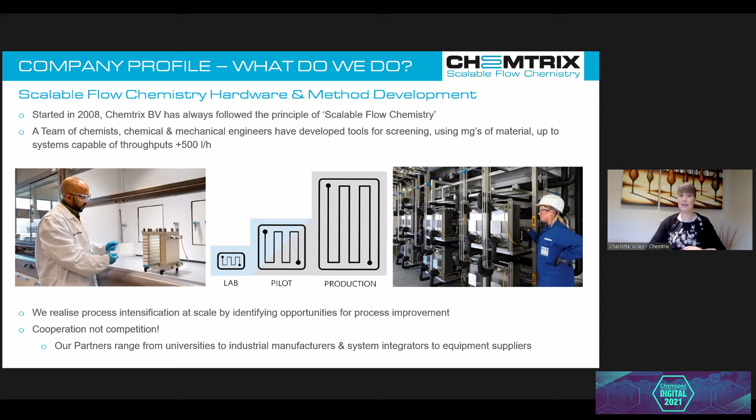We work with universities through to industrial manufacturers, system integrators, suppliers, in order to deliver end-to-end solutions for whatever the problem statement is.

In the last 18 months, we've obviously all seen the impact of COVID, hence why we're at Chemspec Digital and not the live event this year yet. This has highlighted to us how much each country relies on outsourcing in order to obtain critical raw materials, APIs, and even electronic goods.

So we've seen in the past 15 years, people have wanted to reshore manufacturing, but it hasn't really happened.

And this period has really highlighted local supply chains are needed in order to overcome the challenges that have been seen. So APIs especially, raw materials and intermediates, is a very global business with molecules moving from country to country as the value addition increases.

But the border closures, travel bans, and industry shutdowns that we've seen during the COVID period, and even continuing post with difficulties with shipping, have really showed up the resilience that we need within our supply chains, the critical raw materials.

So we're now seeing widespread through US, India, China, Europe, countries assessing alternative value chains.

Can they manufacture locally? Can they finish goods locally? And can they do this on time with surge protection, as opposed to shipping in and stockpiling material from a single country?

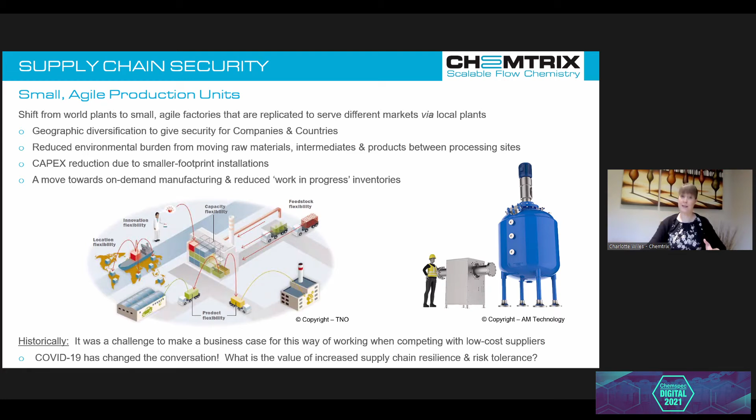So one aspect of this, and not the only solution, but one aspect is continuous manufacturing. We see from the small footprint of the equipment, the process intensification associated with it, that people can now harness improved process control and shorter development times as a means of performing particularly hazardous chemistries. As a result of this, you end up with a small production unit that's typically in a pilot plant environment compared to a world plant environment.

As a result of this small footprint, you obviously have many benefits towards energy consumption and material production per unit area. So the technology is something that we're seeing being more heavily adopted in the pilot to production area than we've previously seen in the past.

And we see many more companies starting researching, trying to get to grips with what advantages can this technology bring and where should they deploy it to alleviate problems that they've observed over the last 2 years.

We also see for the companies that had already pre-invested in this area, companies are directly developing in flow now. They're not first developing a batch route and then putting it into a flow reactor and possibly needing to modify the process, but we are seeing people developing directly, and this is increasing again the speed to market and reducing investment costs and giving the flexibility that people are targeting.

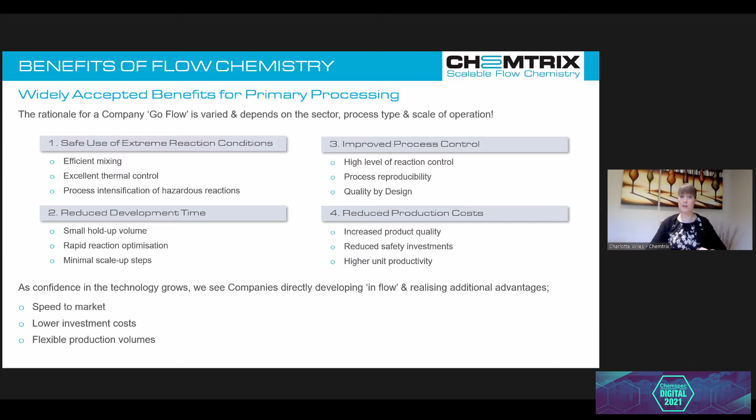So it's really important before you start that you identify what you need from a continuous plant, and this will help you design and engineer in the most forward-thinking approach, but actually the most suitable for the particular molecule that you're wanting to implement initially.

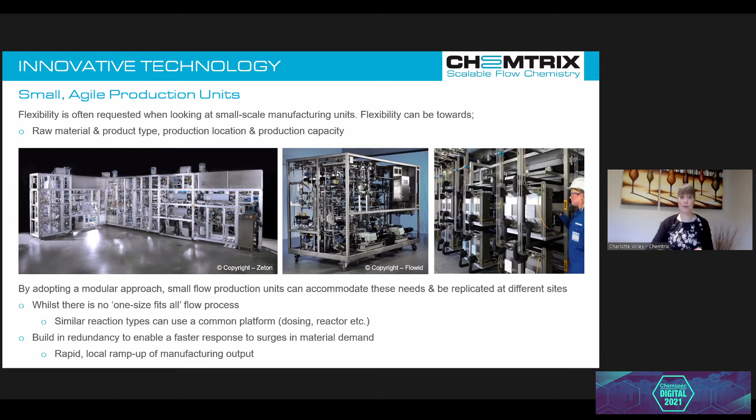And I think it's this flexibility that brings a lot of attraction to contract manufacturers, as they're able to reconfigure the hardware to deliver different molecules and different campaign lengths for different customers.

So in the images, what you can see here on the left-hand side is a plant developed by Zeton and built for GSK. And you can see from the grid-like structure, modules are built together in order to deliver the final configuration. This allows you to have freedom over repurposing pumps, residence time units, chillers, etc. So you could redeploy these parts smartly to develop different processes and manufacture different materials.

In the center here, you've got a system that I'll show you a little bit more detail later from Flowid, working together with a pharmaceutical company. And you can see this is it. It's got wheels. It's a small modular footprint flow reactor. And the idea here is that it can be wheeled into a factory, and it actually sits between existing batch assets that form the upstream and downstream reaction steps.

So here you've got something small, modular, but more dedicated to a single piece of chemistry or a class of chemistries. And on the right, you can see an installation that we've got together with Patheon, Thermo Fisher in Austria. And you can see modularity here is addressed with multiple reactors in parallel, allowing you to turn up or down productivity as market demand changes.

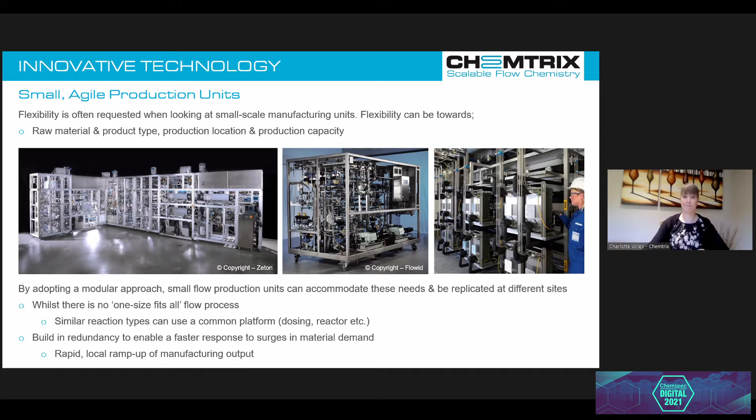So for those of you that are new to continuous, I'll just give you a little brief as to the main features of flow reactions and how they're performed. You are typically working with reagent streams that need to be separated before they are mixed, and that's when the transformation takes place. So typically we're working with a pair of pumps, some form of mixing element, a thermal control section, and a collection strategy.

So the key to understanding how you work with flow is that you're adapting your equipment to suit your chemistry, and you're not adapting your chemistry to suit your batch vessel. So if you have a highly energetic chemistry, for example, you're going to be looking at a small channel with a high surface to volume ratio that can relatively easily cope with the heat release.

If you've got a suspension-based chemistry, you would be looking at a reactor with a larger volume and maybe active mixing within it so that you can handle that slurry. So we're not trying to squeeze all chemistries into flow, but we're looking for those ones that have a technical benefit for transforming into a continuous process.

So the heart of a system you would think would be the reactor, but honestly, you need a good dosing system. If you're not delivering well to your reactor a good stable flow of reagent, you will get deviations in your product, and this will affect the quality of what you're generating. So really key is to choose your dosing system well and ensure that it's appropriate for the reaction conditions, the temperature, the pressure, and the corrosivity of your chemical.

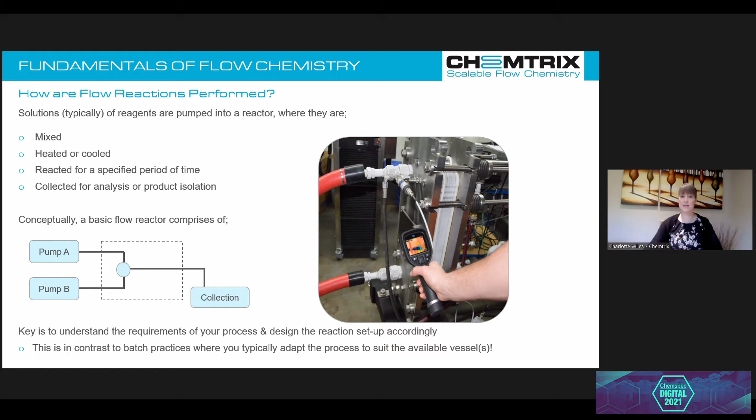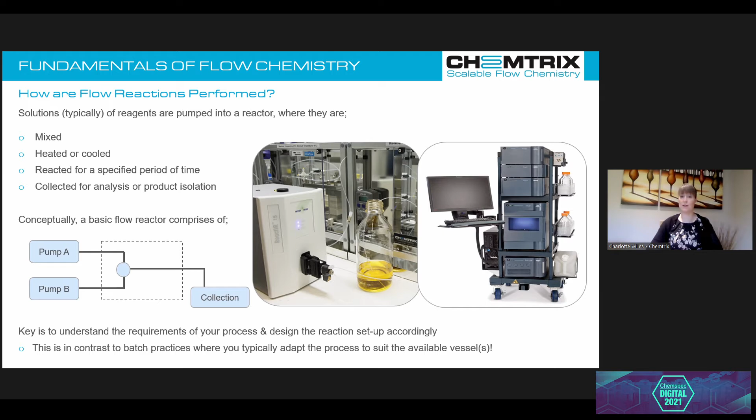You then choose an appropriate reactor with the right thermal control associated with it, depending on the exotherm that's required. You put PAT in place, could be as simple as flow meters, pressure temperature sensors, all the way through to UPLC for online or at-line determination of your critical raw material attributes and product attributes.

And because of the intensification of these processes, you are typically in what would normally be a kind of pilot scale environment, but you're able to manufacture really significant quantities of material, as I'll show you in some of the examples.

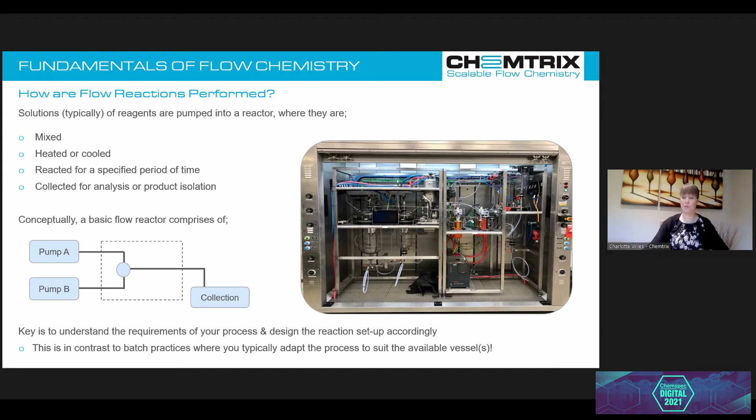So the challenges and the opportunities with flow come from the scale that you're working at. And here we've got an example from Eli Lilly. And this just gives you a broad overview of why people would technically choose to use continuous. You can see you've got your high energy reactions, your fast processes, unstable intermediates, ability to do route redesign and approach either convergently or divergently your molecule, expanding capacity. So many different reasons why you would choose to use the technology.

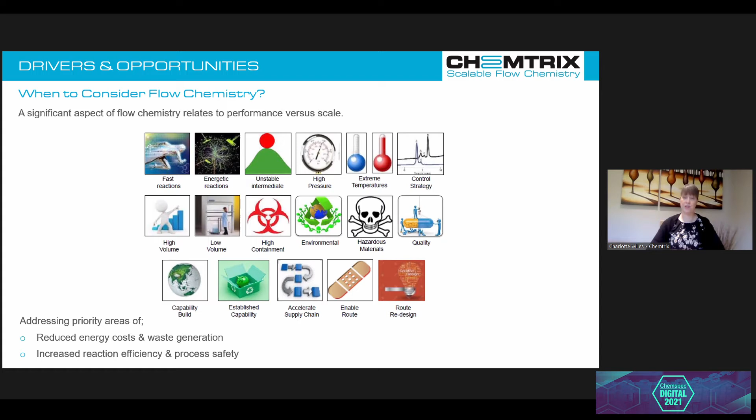And it's really important at the outset of a project that you identify why you're looking to transform your process or conduct it in flow. And this will help you with the implementation really clearly from the outset. So we've been addressing in the last, I would say, 3 to 4 years, priority areas of companies where initially energy cost reduction, waste generation reduction, and an increase in process safety and reaction efficiency. And obviously the last 2 years, that's also shifted to supply chain management and local production control.

So we take projects with partners all the way from theoretical evaluation through to realization. And one of the key parts of continuous manufacturing is defining your process targets. What are you trying to do by going continuous? What's the actual problem that you're trying to fix?

We see a lot of R&D laboratories defining a problem statement without necessarily talking to pilot or production colleagues. And as a result, there can be a solution to a problem that's not really there by the time you get through to manufacturing, and vice versa. The manufacturing colleagues solve on a daily basis a lot of challenges that the R&D team may not be aware of. So we put a lot of energy upfront into this theoretical evaluation. What are the company's opportunities for process improvement, and what is the real problem statement? Once that's in mind, you can go over to feasibility studies.

You can do this in-house, you can do this with a partner or a contract research organization, but you perform the initial lab trials that can deliver proof of concept and outline the milestones that need to be achieved for an optimal process. And if you get a go at that stage, you go into the more detailed parameter optimization, which also, very importantly, defines the process parameters for your engineering design.

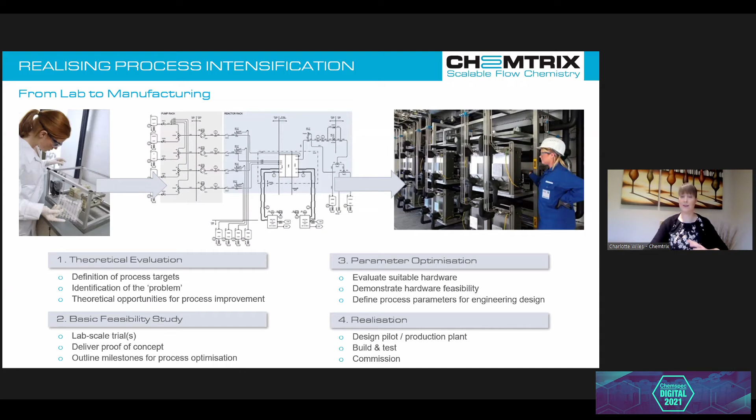So I'm going to give you some examples now of how people have used the technology, typically focusing on energetic chemistries, ones where control was required and local manufacturing and large-scale storage were trying to be avoided. So here you can see a piece of work that we did on a Dakin oxidation using peroxide. We've got here an inline infrared unit, and we're also looking at using a metal-free flow reactor, largely due to the hazards associated with handling peroxide within metal-based systems.

The target of the company was a more direct oxidation route as opposed to multi-stages to get to catechol kind of materials. And they had had an issue with storage of hydrogen peroxide on site many years back. So they were looking at a small scale continuous use of that material rather than large batch tank operation. And what we were able to do was transform the process from 6-hour fed batch into a 30-second flow reactor, obtaining in a typical shift of 8 hours in the lab just under 5 kilos of material. So if this needs to then go into production, depending on the material requirements of the market, you would leave this reactor running for longer, or you would upscale to a larger unit and go into a pilot infrastructure.

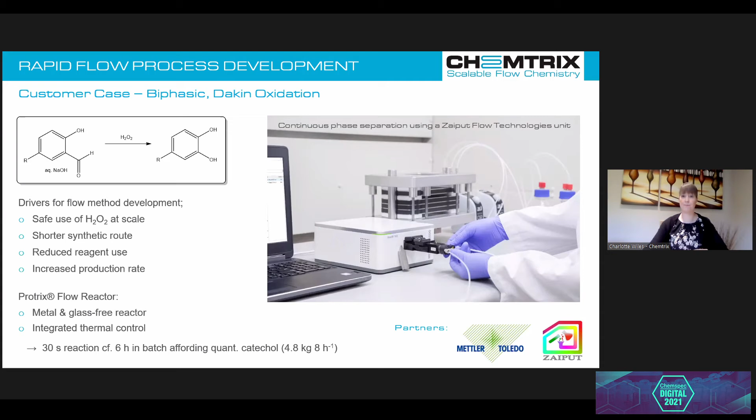If we're looking towards chemistries that are challenging to perform, we did a piece of work with AstraZeneca and Graz University with Oliver Kappe. And here you can see AstraZeneca were targeting a specific reduction to be performed via the Wolff-Kishner reaction. The use of hot hydrazine, highly caustic, high temperature reaction mixtures meant this is a challenge to actually do at scale. So we looked at developing a continuous process, again targeting metal-free because of the degradation of the hydrazine in the presence of a metal and the highly caustic material that was being used.

And for flow, this is not a particularly short reaction time. 20 minutes were needed in order to efficiently reduce the material, but that was enough to increase the yield by 40% and have a high product purity by changing solvent from what would traditionally have been used in the batch environment. So this is something where we're able to increase throughput, decrease reaction time, and obtain active pharmaceutical ingredients using small footprint systems.

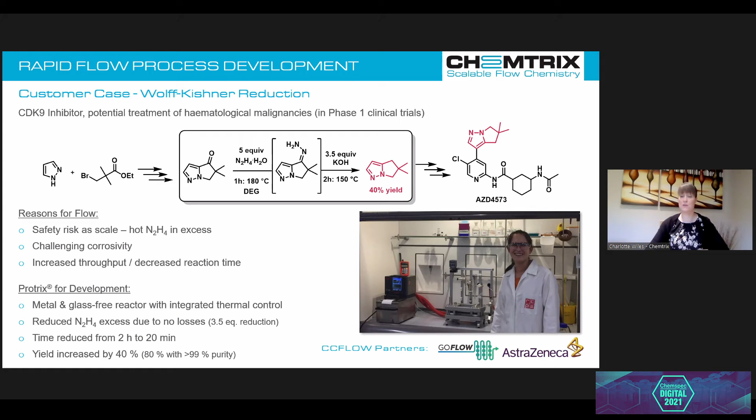It's not just Europe where these activities are taking place. We see partners in China developing new synthetic routes, new cost-effective methods as a mechanism of producing nutraceuticals, for example. Here you can see vitamin B1 or thiamine, which starts from a raw material where we're having to do a very selective, specific monochlorination. Using a flow reactor here, you can see in the schematic, we're able to feed the lactone in directly with chlorine gas with a scrubber after and obtain the chlorinated intermediate.

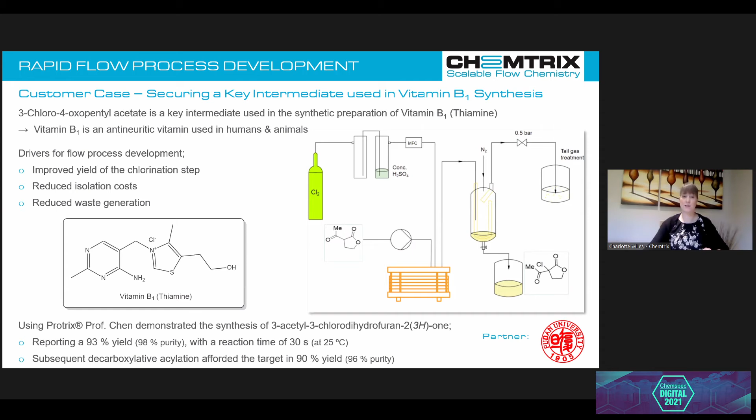This is then treated downstream with a decarboxylative acylation, also continuous, obtaining the product with a 30-second reaction time and a moderate temperature of 25 degrees. So you can perform highly energetic chemistries due to the high surface to volume ratio that these reactors bring you. And this is a process now that's actively being scaled up as a telescoped process to vitamin B1.

So local manufacturing has got the potential to have the most impact in countries that do not have existing infrastructure. So if you consider countries like South Africa and other underdeveloped countries when it comes to chemical manufacture, they're almost paying over the odds for active pharmaceutical ingredients that then need to be formulated locally to be delivered to the local population. And we see a huge potential in countries such as South Africa having their own API manufacturing. And because batch doesn't exist in these territories, it's a good location for people to go directly into the newest technology and start to look to continuous.

So this is a global concern. However, locally in South Africa, as diets are changing, there is an increase in the incidence of type 2 diabetes. So together with partners, Professor Watts is looking into synthetic strategies to locally develop these generic drugs. And this will give control not only on formulation locally, but also the API, and that will give cost reduction and also more availability to the local population.

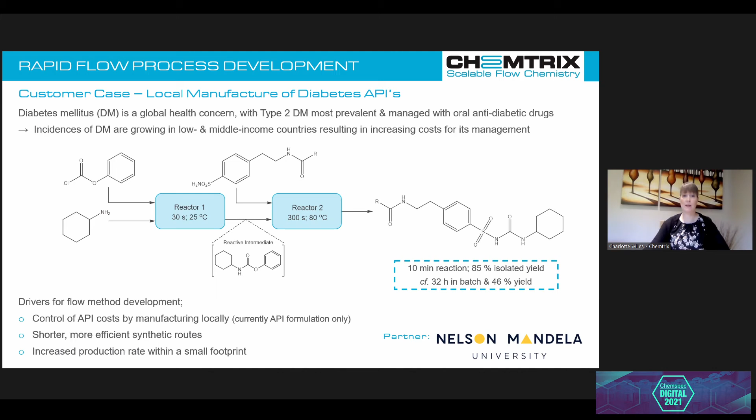So here you can see an example of their setup performed within a glass-based reactor system that you can see here. And they've done recently 4 different anti-diabetic active pharmaceutical ingredients. You can see 2 common structures with different R groups giving access to different final products.

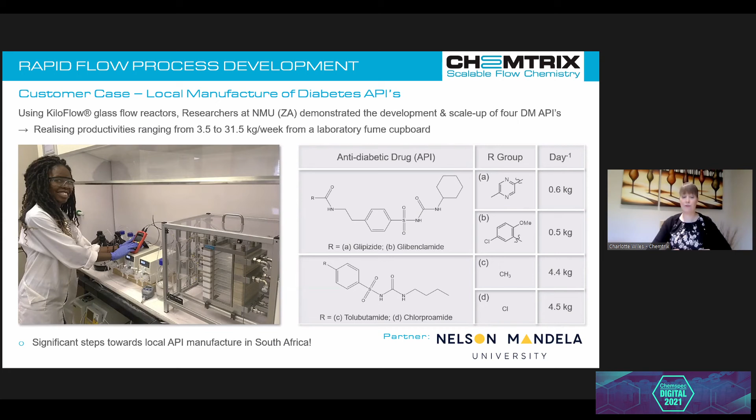And here from a small, really lab scale 20 mL size reactor, you're able to be demonstrating at the sub to multi-kilo level per day within a research institute. So this is a significant step towards local API manufacture in South Africa, now capable of getting up to almost 32 kilos a week from a fume cupboard in order to demonstrate the viability of this technology.

Other companies also look at small footprint, larger manufacturing, and this tends to be in the contract manufacturing space. Here's a piece of work with Buchem, a Dutch company, also with the engineering with a partner, FlowID. There was a production challenge due to headspace, looking at as you scale a process, the headspace influence on the reaction actually was looking towards a stalling of a chemical process. So it wasn't really very straightforward to make more than a kilo of a target material for their particular customer.

So together we developed the process chemistry at the lab scale and transferred that into this pilot unit that you can see here. The material was a lacrimator, very smelly compound, also huge emphasis on putting this in a small footprint enclosed environment. And what they developed was a dosing system fed from an adjacent fume cupboard. The flow reactor and product collected within the second fume cupboard here.

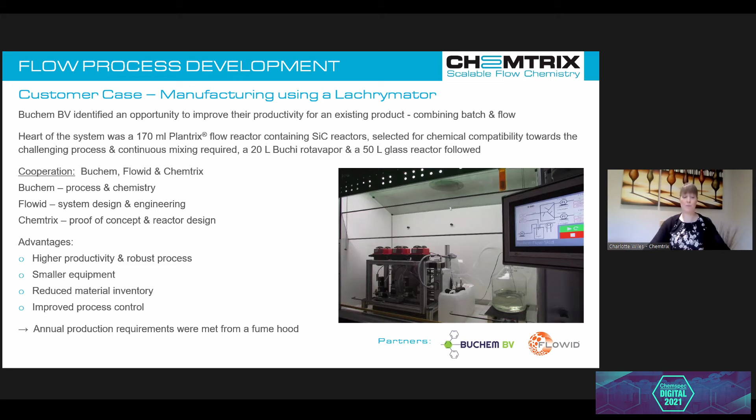You can see the automation panel designed by FlowID on the front. And then the material went straight into a rotavapor. And this was then easily able to be processed downstream for the final reaction step. So this allowed, from a really small footprint environment, to go from a few kilos up to kind of tonnage levels. And this meant annual production requirements for this particular customer could be accessed just from a simple fume cupboard.

Looking to running out of space, we're seeing in developed production environments that the infrastructure is getting really crammed full of hardware, and companies can't continue to keep expanding with their footprint. So in 2017, with Anthem Biosciences, we set up the ability to start looking continuously as a means of better usage of their existing footprint of their manufacturing facility. And the concept there was that they could do contract research, a few hundred grams, develop up to ton scale without needing to continually increase the footprint of their manufacturing site.

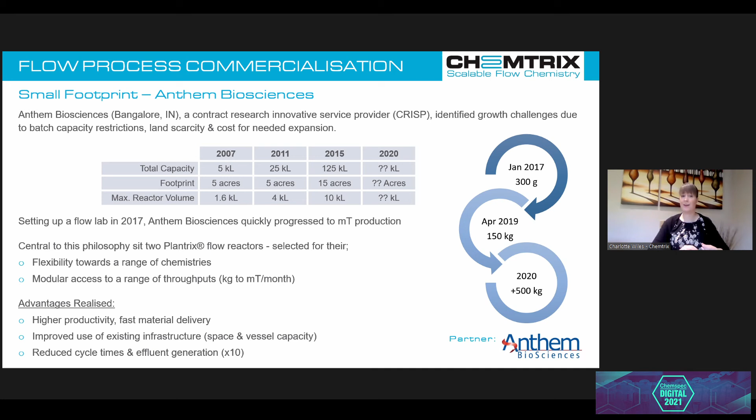You can see historically between 2007 and 2015, they went for batch infrastructure and a very significant increase in acreage and also reactor volume. Going on from this, we're looking at putting small modular footprint equipment within that existing infrastructure to access tonnage quantities of material for customers. So not only better use of infrastructure, but reduced cycle times, reduced effluent generation, and a faster material delivery for their clients.

As an innovator, Merck have worked with FlowID and ourselves to develop a flow process. So chemistry developed in-house and then engineering outsourced to come to this small mobile continuous flow reaction step, as I said before, that fits within the existing batch infrastructure to use input from a batch vessel, continuous flow, and then batch input again. So this is a hybrid system looking at debottlenecking a plant and was used for a generation 2 formulation.

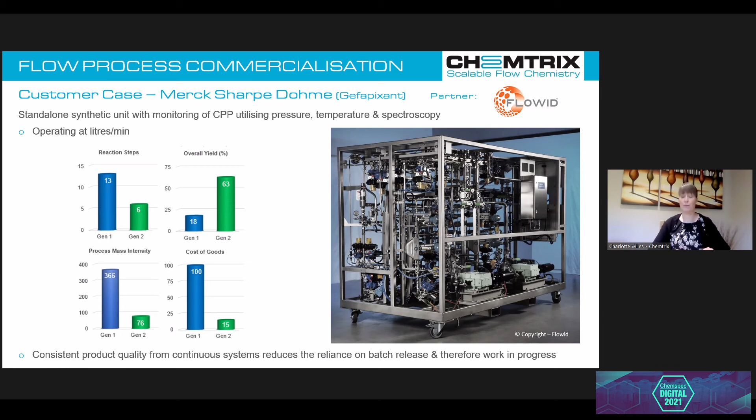So you can see going from generation 1 to generation 2, by targeting continuous, a number of reaction steps were reduced. The overall yield of the process was dramatically increased, and the process mass intensity significantly decreased together with cost of goods. So for innovators, we're not always seeing this technology adopted for the first generation process, but we are seeing an awful lot of second generation and generic manufacturers targeting process improvements using continuous.

Ajinomoto Biopharma are one such company. They're a contract research and manufacturing organization that switched to flow, and specifically pilot scale continuous, towards the end of 2017. In this particular process that I'll show you, they chose continuous because they had 3 exothermic reaction steps that required very slow fed batch addition. As a contract manufacturer, this is not advantageous because it uses up your batch capabilities simply for slow material addition to maintain reaction control and temperature. In addition, they've got a potent product, so they'd like to be contained and minimize exposure to the operator in order to perform this chemistry.

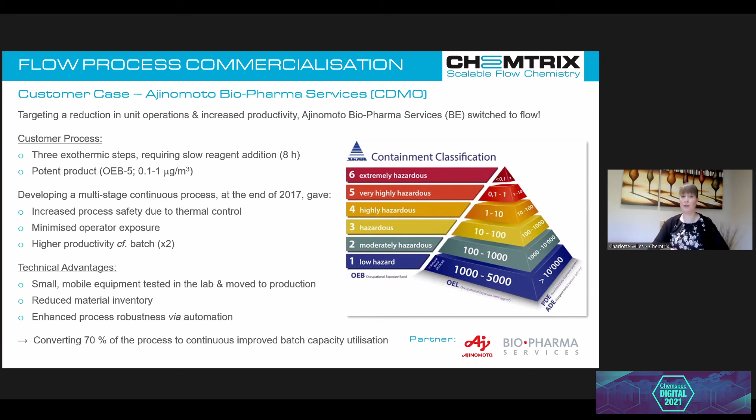So towards the end of 2017, at the pilot scale, they had developed a continuous process where they were transforming the first 2 highly energetic reaction steps within our plug-flow reactors as a means of minimizing issues with scale-up on thermal control. And they found that they were able to get a higher productivity compared to batch, almost double, when they moved into their small pilot equipment.

Here you can see a similar strategy to GSK: small modules comprising pumps, reactors, dosing, and control units. The advantage here was that they were able to take these individual small units, test them within the laboratory, and once they were sure this was all working as they wanted, the whole unit could then be moved and used for production. So there was no tech transfer between the piloting work and the manufacturing.

This obviously gives you increased process robustness and speed for making that transfer. In addition, 70% of the process went continuous, which improved batch capacity utilization that could be used for other production processes and other customers.

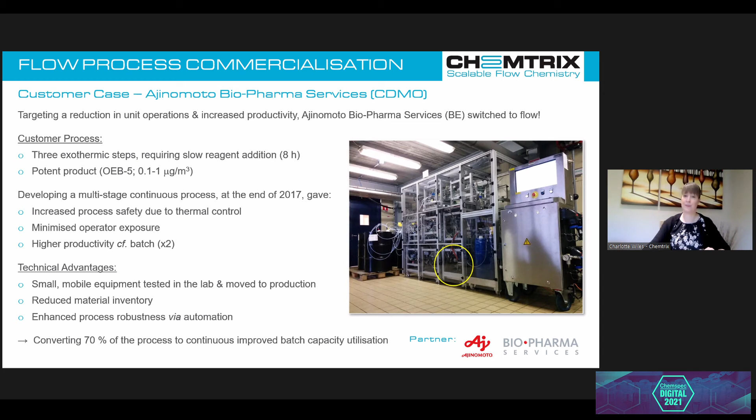And since 2017, when that piloting work took place, they've been working to scale up and commission a larger production unit. You can see this in the picture here on the right. Now you have your dosing system, your reactor, and you can see your input controls for your thermal control here. So still a really small footprint. This is 3 chemical steps, 2 continuous and 1 batch, delivering over 500 metric tons of active compound produced since commissioning in 2020.

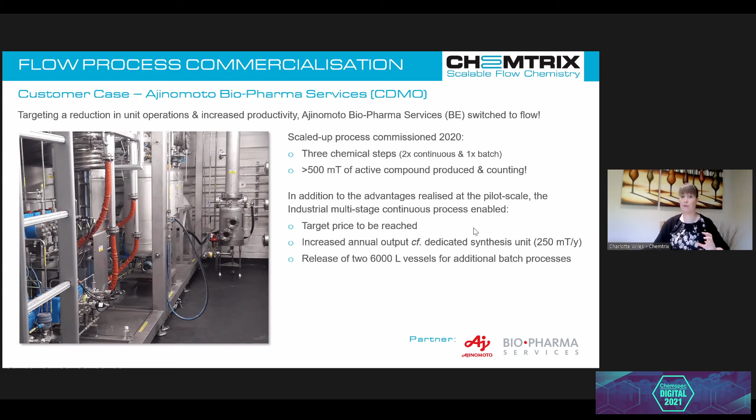In addition to the advantages found at the pilot scale, the industrial multi-stage continuous process has allowed them to demonstrate that they could reach the target price for material production for their client, and they could increase the annual output compared to the dedicated synthesis unit based on batch, which was restricted to 250 metric tons per year. And it's released at the synthesis unit two 6,000 litre vessels, which now can be used for additional batch processes.

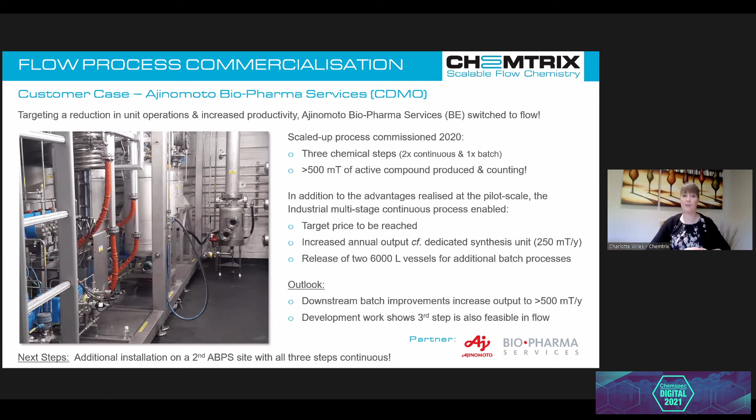The outlook is that there are further improvements that can be made, and they're actively working on downstream batch steps to increase the output beyond the 500 metric tons per year. Development work ongoing alongside this commissioning has shown that a 3rd reaction step is also feasible continuously. So the plan is that a 2nd installation of this type on another Ajinomoto site will take place, with all 3 steps continuous, giving over 500 metric tons per year capability at a 2nd location. This shows you how you can develop modular processes from the lab into pilot, into production, and then look to replicate as market demand changes.

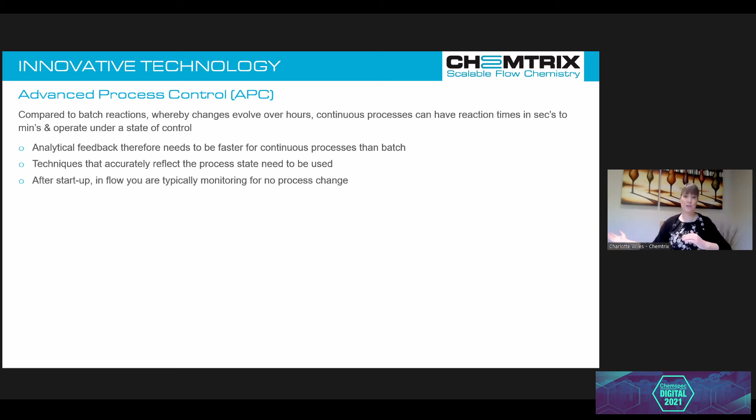In addition to continuous and the actual flow process itself, we need to look at how we control our processes. We see a lot of advancements for advanced process control, with analytical feedback needing to be much quicker in a continuous process than in batch. We need techniques that reflect the process state at that precise time, not 10 minutes, an hour, or 2 days later. So we need to be constantly monitoring our processes for quality and for corrective action. Advanced process control brings us benefits towards having fully automated, fully repeatable, deployable production units.

So we design at the lab and pilot a manufacturing process that needs to meet the critical quality attributes and targets of that particular molecule. We need to understand early on the impact of process parameter variability. This relates more to the engineering aspect than the chemistry, where we can understand what influence deviations in pressure, temperature, and flow rate can have on product quality. This allows you to reach a high process control, high process understanding area, giving you robustness of your process within the tolerances of the engineered equipment you decide to implement.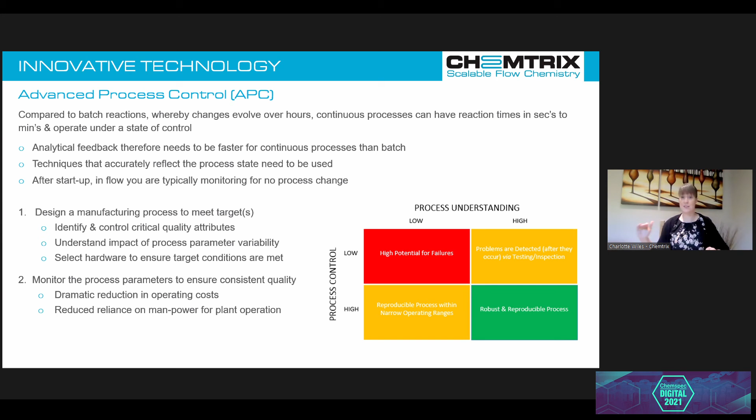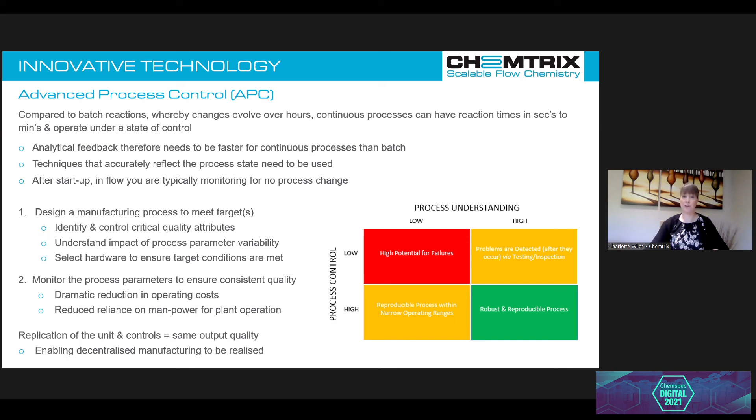By monitoring constantly, we have consistency of quality. We can reduce operating costs, and reduce the reliance on corrective action and manpower for operating such plants. It also helps with replicating units, because if you duplicate what you have, the same reaction product will be possible within a different environment. So this is key to decentralizing manufacturing, bringing advanced process control and continuous together.

So to summarize, we are seeing recent global events changing the way people are looking at manufacturing of fine chemicals, specialty through to the APIs. And there is a favouring of in-house or local and distributed manufacturing models on the basis of small production units rather than global single source world plants.

And whilst continuous manufacturing is not the answer to everything, it does bring an opportunity to change conventional supply chains and have model predictive control, modular, flexible, small units that can address part of the industry requirements.

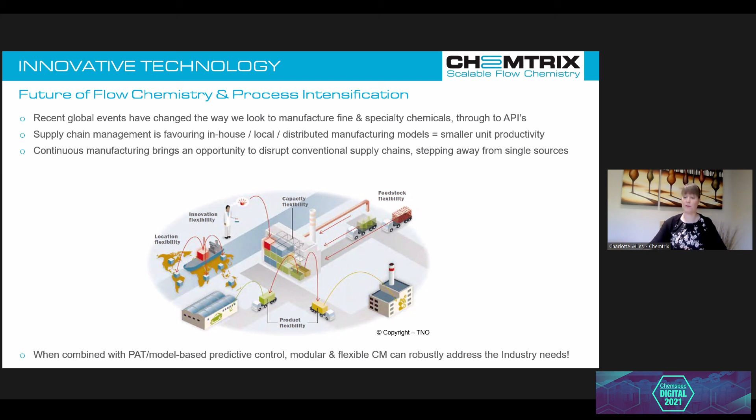So it's not a new technology. It's used really widely in oil and gas, food industries, but we are seeing in the last 5 years it really is becoming more of a revolution in the fine, agro and pharma applications.

And the advantages are realistic. They're about process intensification and process improvement, looking towards safety and product quality. But from a business perspective, just-in-time manufacturing, reductions in your capex and opex, and shorter de-risked supply chains are what are pushing this forwards at the moment.

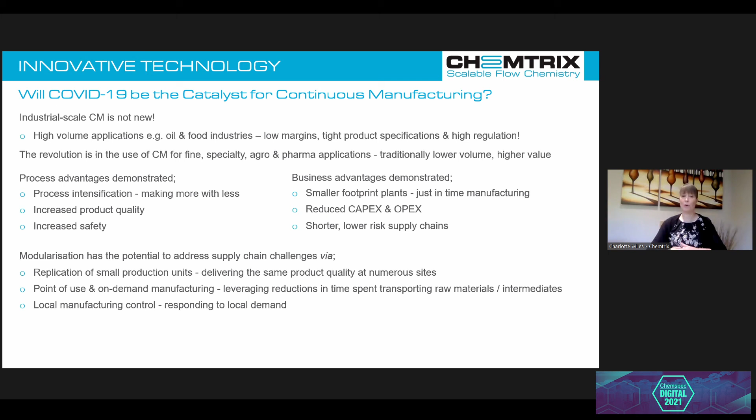So potential to improve supply chains, replicating point of use, on-demand manufacture, and responding to local demands, even if it's for pandemic situations like the Americans are putting together strategies to be able to deal with things like COVID a second time. But we are seeing very many different ways that this modularization can help address supply chain challenges within the industry.

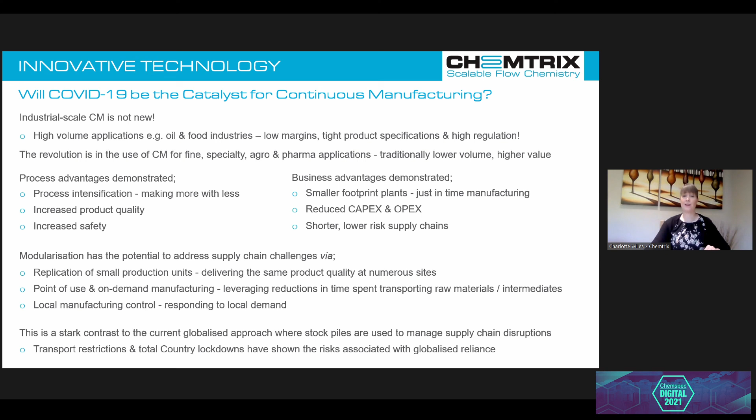So it's a really big contrast to where we were 2-3 years ago, where stockpiles were the solution, but now we're looking at local manufacturing.

Regulatory is a really clear place that additional work is needed. People have a bit of a reservation, especially pharma companies. Will the regulators accept this technology?

In July this year, the draft guidance ICH Q13 was released for comment. So I urge you all to take a look at that. It's a big document, but it's got a lot of information about drug substance versus drug product, continuous manufacturing.

These were drug, actually oral solid doses. However, in subsequent years, we have seen the first API also approved by the US FDA. So it's a technology that is increasing in its implementation, all the way from critical raw materials through to the API.